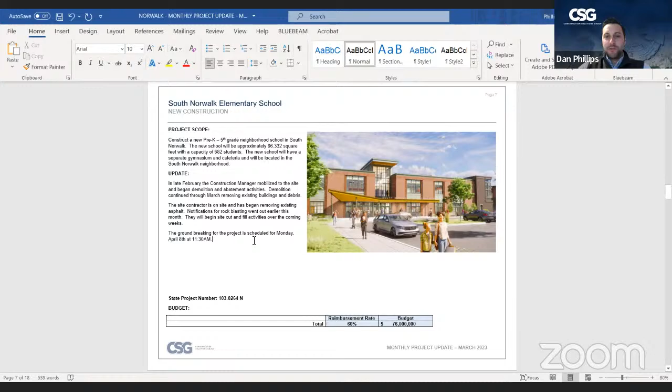Now the exciting part I wanted to share is the site demolition. I don't know how familiar you are with this site, but there was one large metal shed here, another shed a little closer in the foreground, and off to our right, which I'll show you in a minute, is where the building will be placed. Since this photo was taken, the Hatch and Bailey office building has been demolished. There's another smaller brick building in front, but this brick building is next in line to be demolished.

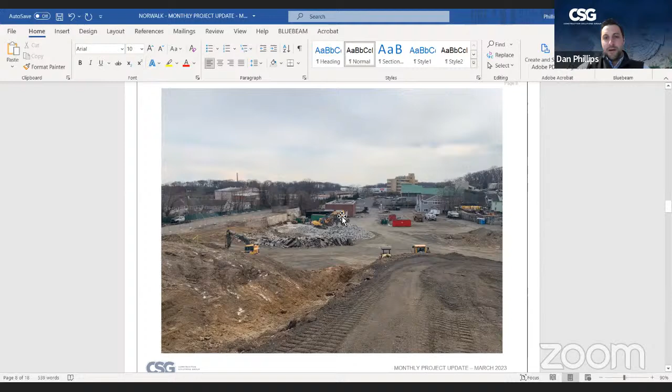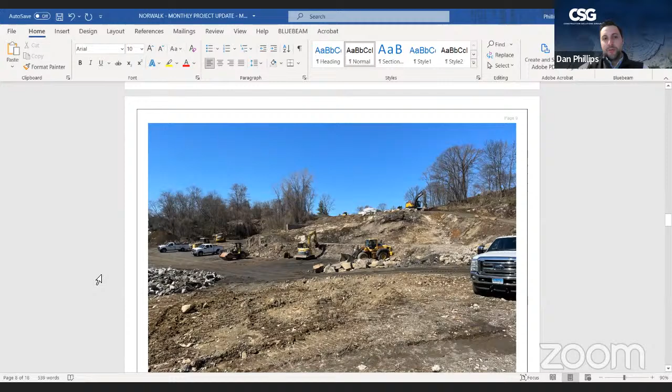We'll go down here a little bit. This is looking back up the hill. Here's the rock outcropping at the corner of our building footprint, which is going to be in this area. Over to the left here would have been that deeper metal shed building they had on site.

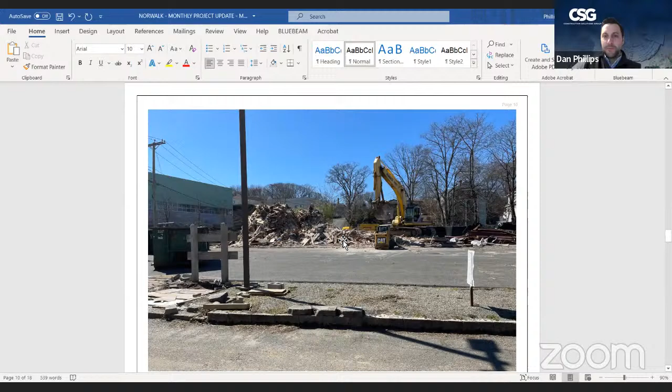Here's a photo of the Hatch and Bailey office building that used to be right as you enter the site on the left. That has been demolished, and they're in the process of sorting the material. You can see steel off to the side for recycling, and the rest of the building debris is getting cleaned up now. The plan is that, as we discussed with the groundbreaking ceremony, a lot of this debris will be completely cleaned up and off the site by the time we have that event. This slab should be removed, and this area will be backfilled and graded.

And then I think this is the last photo we have. Here they've started to prepare for the building footprint area. This was that rock outcropping again, which needs to be blasted, but they've pulled back all of the soil, identifying how much rock will need to be removed. And that's something we're tracking to confirm the quantity of rock removal as part of the project.

By prepping this area, we're able to start laying out and begin our cut and fill operations, where we'll excavate for the foundations of the building, and that material will be placed lower on the site because we are building up the parking lot quite a bit. This area comes down a little bit to provide some balance in the cut fill on the site.

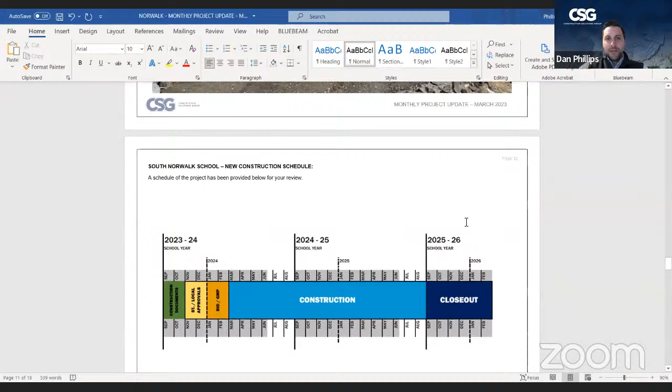And that's really what we have for South Norwalk. Any questions?

No question, Dan, just out of curiosity, for the rock blasting, you said notices went out to some of the neighboring properties. What does the notice say? What is the extent of the rock blasting, and is it during the day? What times? It's during normal working hours typically. There are, from what I understand, and I wasn't intimately involved in the permitting process, but talking to the construction manager who is managing it, the residences were within, I think, 750 feet of the blasting site, and that warrants a notification.

And I may be off, but I believe if it's within 500 feet, that triggers an inspection and survey of their property to see the existing conditions prior to the blasting, and then it would require vibration monitoring as well, done on site as well as at their home. But my high level understanding from speaking to the construction manager is it's a large site, so we are a good distance from these residences, and it's more a notification so they're aware of the blasting. It's not so close that we're concerned with vibrations or potential damage. So that's what I gathered from the whole blasting for this project.

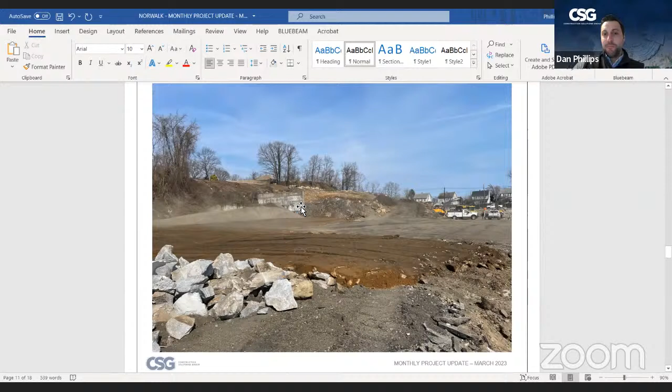I don't have that information, but it isn't a lot of blasting. It's really this outcropping to make way for the building, the corner of the building - my estimate would be about 2 weeks. There will be some rock crushing and other activities that do create noise on site after that, but I would think in about a month we'll be back in the ground digging, and the rock should be behind us. Thank you.

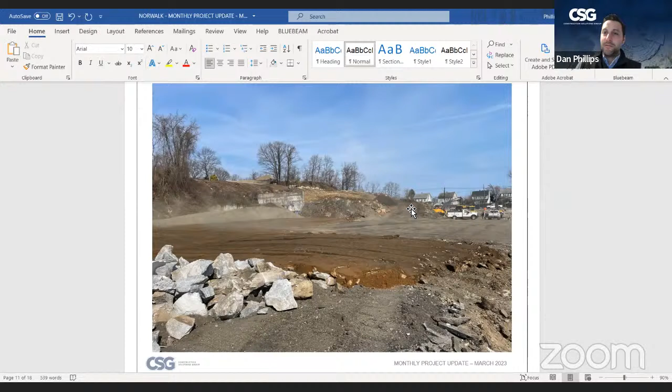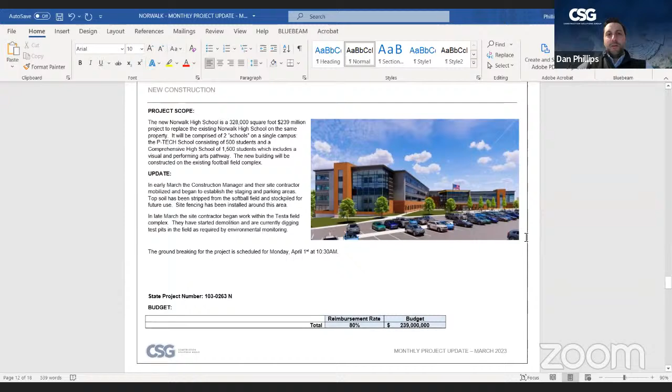And if there's no other questions for South Norwalk, I'll jump right into the high school project. So over at the high school, the construction manager and their site contractor mobilized in early March. I'm sure driving through Norwalk, it's hard to miss - they've taken over that softball field. They've stripped the topsoil so that can be stockpiled for future use, and then they began installing the site fencing around that area.

And what that does, it does a couple things, and we'll look at it in these photos. That establishes some construction staging area for materials and equipment, as well as the contractor parking and the construction manager's trailers for the project. Next to that contractor parking, there's an extended parking area that is currently just stone, but in the coming weeks that will be paved, and that will be the additional staff parking required throughout the construction process. So that'll be there for about 3 years - that's why they made the decision to pave it. I think they believe that adds about 40 parking spots necessary to support the staff.

We talked about it, I heard you talking about it briefly before. Starting in early April, April 1st, April 2nd, there will be a transition for the flow of traffic through the site. They will be taking from the island in that parking lot back to the Testa football field, which will become part of the construction site. There'll be a fence that goes right down the middle of that island, and they also grab that parking lot at the very end. It's kind of a loop.

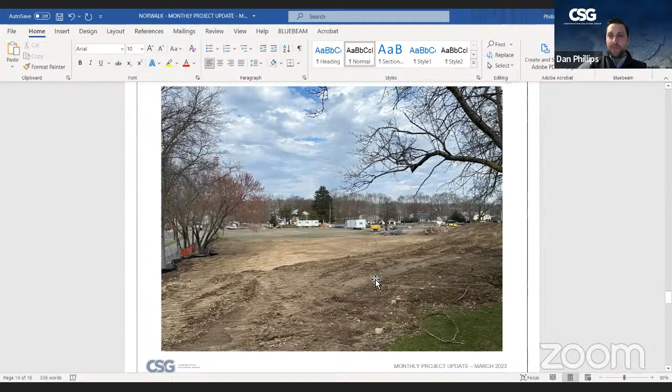The trailer for the construction manager has been delivered. This area has different material which will be used for contractor parking, and this area will be staging for materials and equipment throughout construction, since we're pretty tight on the top of the site.

This is off of the parking lot on County. You can see they took out the curb and extended this area, and they're in the process of striping it. Beginning next week, staff can begin parking down in this area, which is overflow parking to provide enough spots throughout construction. This will be paved, but the complication is that asphalt plants don't open until the weather is warm and stays warm. As soon as that happens in the next couple of weeks, this will be paved and be the temporary parking for the next couple of years.

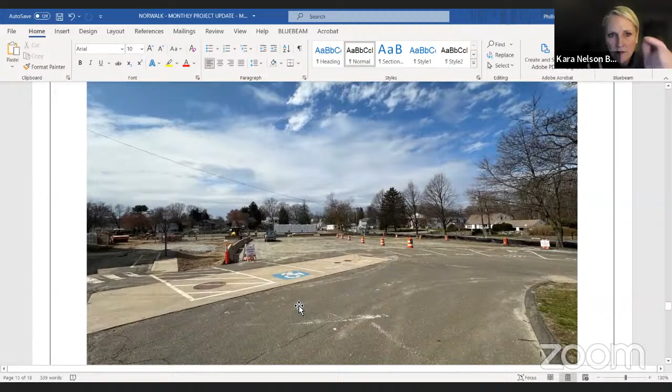Dan, I have a question about that view. If you scroll back to the other one, over to the left is the building itself, and that's the entrance into the kitchen and cafeteria, where food service goes in with food deliveries. How is that being impacted with this?

Bill Hodel has brought that up as a concern in some of our planning meetings. You can see here this will be the access to our contractor parking through this area. We were able to move the existing dumpsters to the other side. That loading area, that door, and access for larger trucks to back up won't be impacted - it's out of the way. There may be a rare case where someone pulls out and needs to move, but our logistics plan keeps that area functioning independently for easy deliveries, since that's a key access point for food service. The construction manager is aware of that, and while it doesn't show the full picture here, it's tight, but there's no reason that anyone entering or exiting our site would block that entrance for a truck backing up.

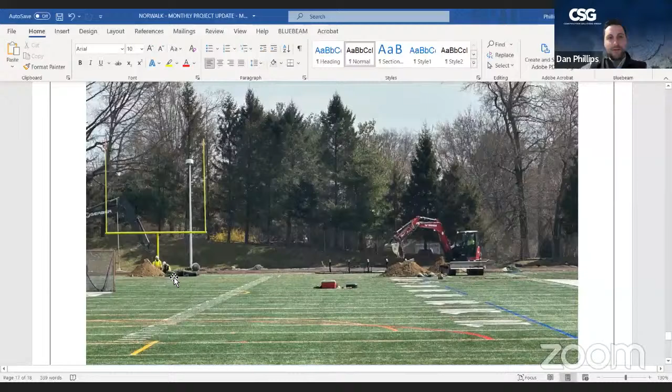I'm not gonna lie, it makes me a little sad to say goodbye to Testa Field - lots of fun games played there. Well, the new school's field will be very impressive.

Something to look forward to - it's hello to the future. Yes, but don't forget my son played on that field for 4 years. So yeah, it's a little bittersweet, Colin. It's a little personal, I understand. Yeah, it's all good. There's definitely always some growing pains, but at the end of the day, I think everyone will be very happy with the new facility.

And that's really all I have to share with everyone this evening.